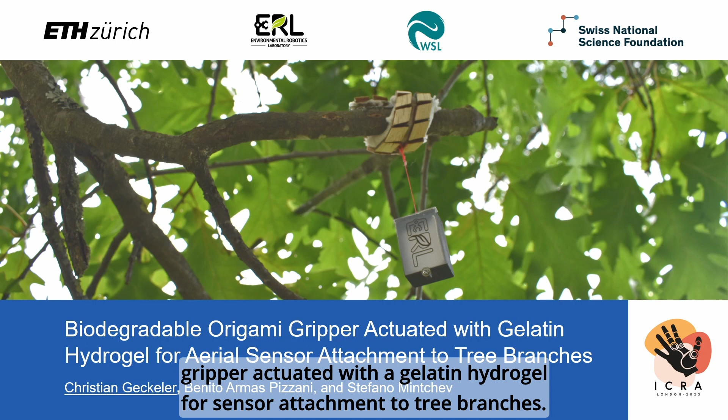Today I have the pleasure of talking about our work on a biodegradable origami gripper, actuated with a gelatin hydrogel for sensor attachment to tree branches.

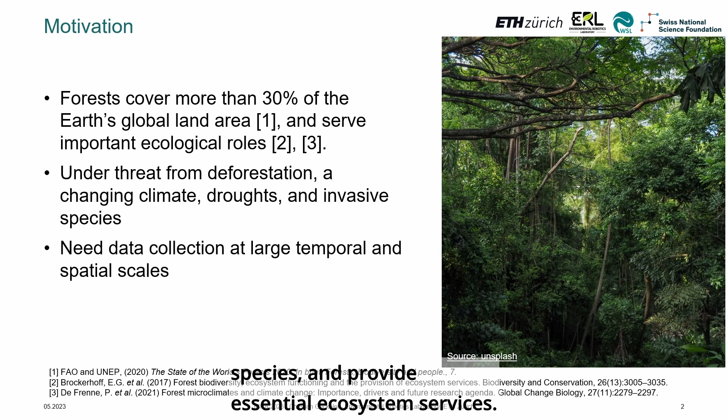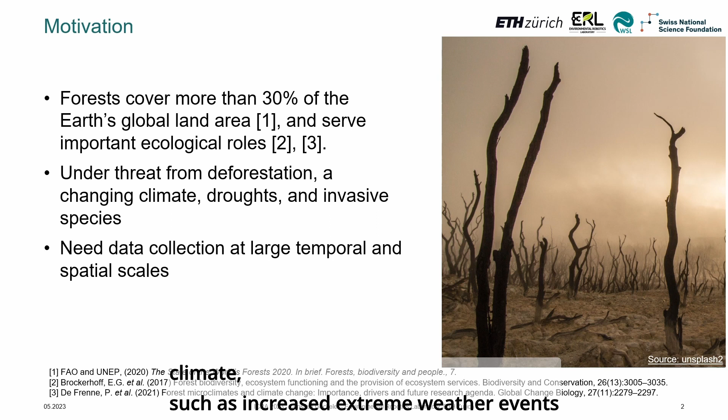Forests cover over a third of all terrestrial land area, are home to a multitude of different species, and provide essential ecosystem services. Yet they are under threat. From deforestation, with 10 million hectares being cut down every year, and from the effects of a changing climate, such as increased extreme weather events like droughts and the spread of invasive pests.

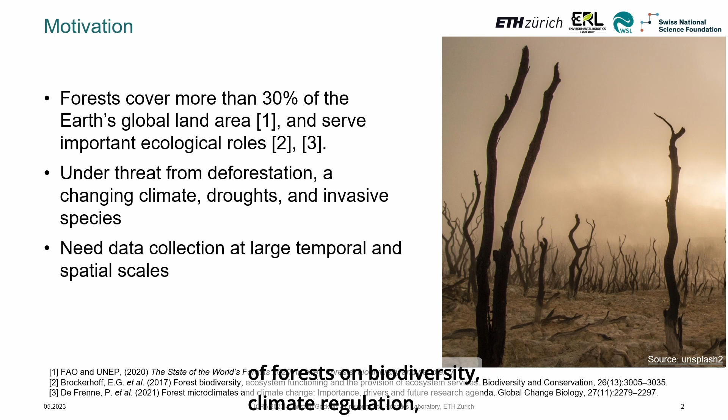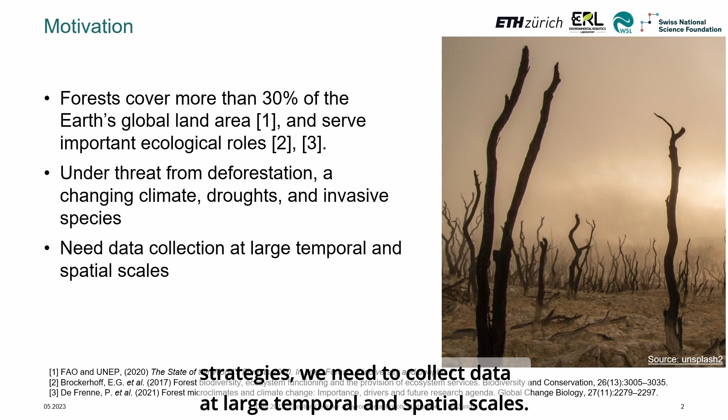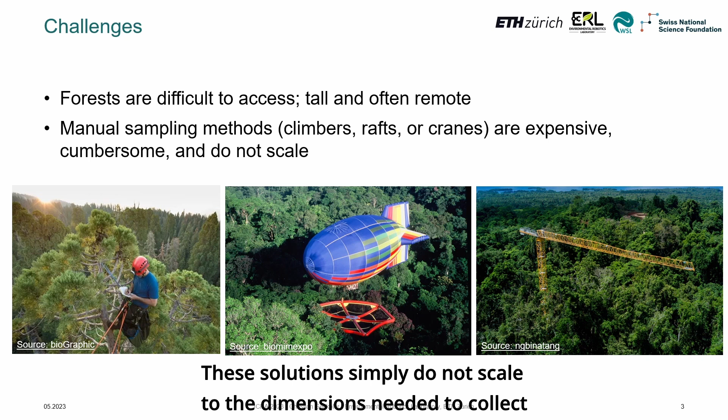In order to understand the impacts of forests on biodiversity, climate regulation, and ecosystem functioning, as well as the effect of forest management strategies, we need to collect data at large temporal and spatial scales. However, the challenge is that forests are very difficult to access, towering dozens of meters above the ground and often situated in remote locations. Current sampling solutions such as climbers, canopy rafts, or cranes are expensive, cumbersome, and labor-intensive. These solutions simply do not scale to the dimensions needed to collect actionable sensor data from the world's forests.

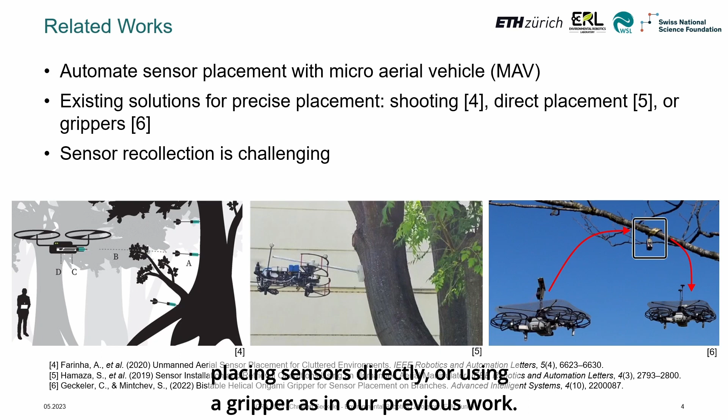Microaerial vehicles present a natural step to introduce automation and scale sensor deployment. Several solutions to precisely place sensors exist, such as shooting sensors, placing sensors directly, or using a gripper, as in our previous work.

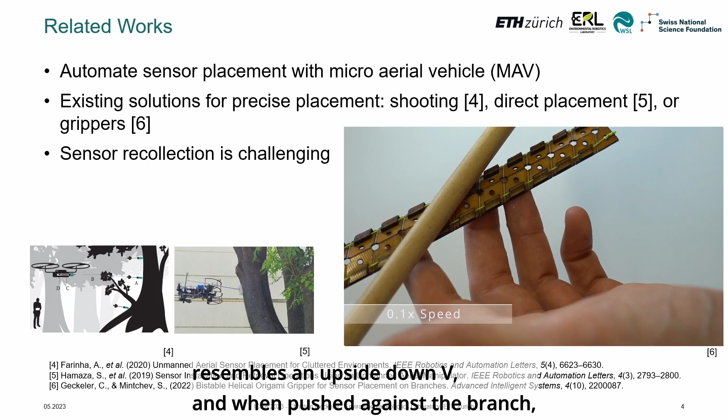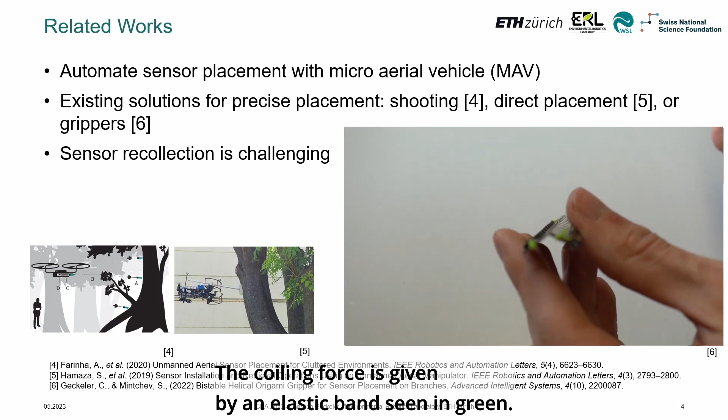Here we see the functioning principle behind the gripper. There is a flat, unfurled state where the cross-section resembles an upside-down V, and when pushed against the branch, it flattens and transitions to the second coiled state. The coiling force is given by an elastic band seen in green. The gripper and sensor can then be deployed on tree branches using a microaerial vehicle.

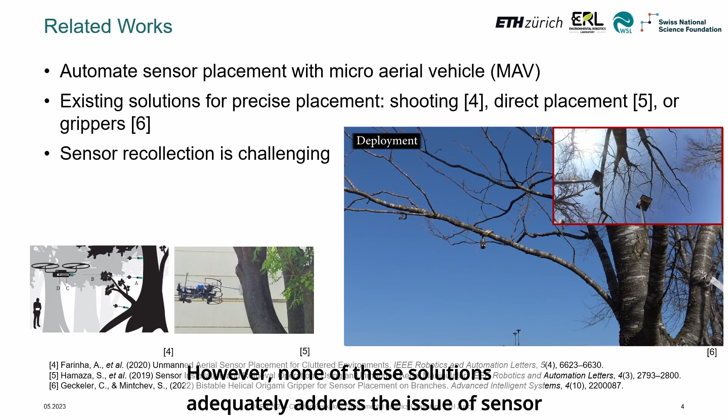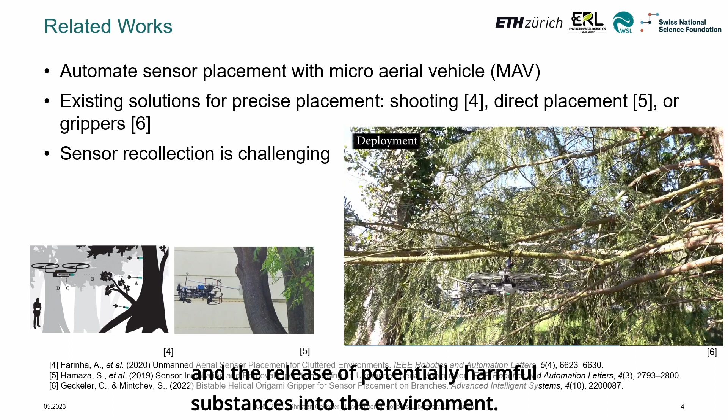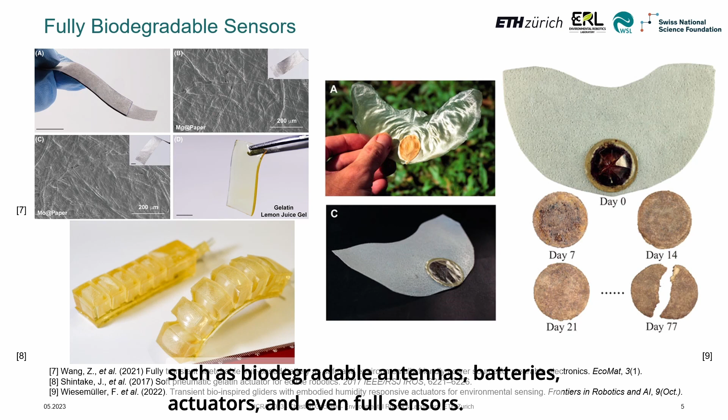However, none of these solutions adequately address the issue of sensor recollection, either neglecting it or requiring complex maneuvers. Nonetheless, recollection is essential to avoid electronic waste and the release of potentially harmful substances into the environment. Ideally, fully biodegradable sensors solve this problem, as they can decompose into harmless substances at the end of their useful life cycle. Much promising work has been done, such as biodegradable antennas, batteries, actuators, and even full sensors. However, such approaches are still under active development and not viable to be deployed in the field.

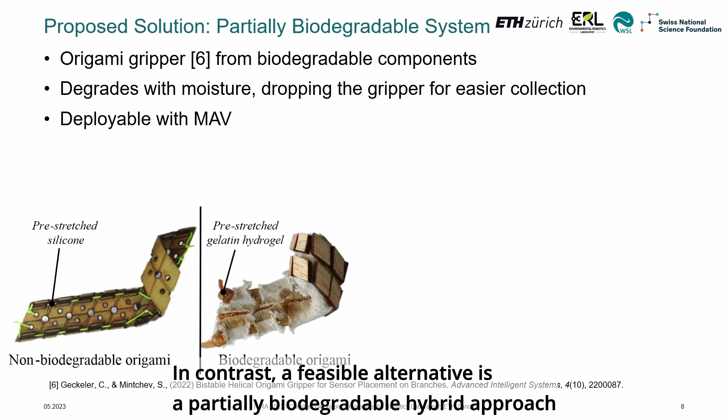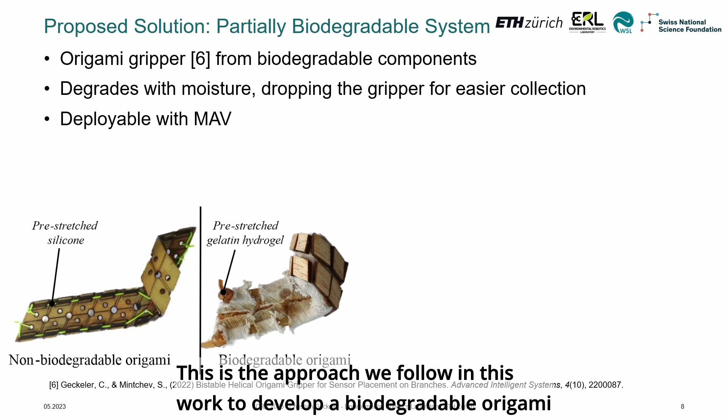In contrast, a feasible alternative is a partially biodegradable hybrid approach, which contains biodegradable components, such as structural or attachment mechanisms, but conventional sensing, communication, and battery elements, since these are the most difficult to replicate with biodegradable materials. This is the approach we follow in this work to develop a biodegradable origami gripper to attach non-biodegradable sensors to tree branches.

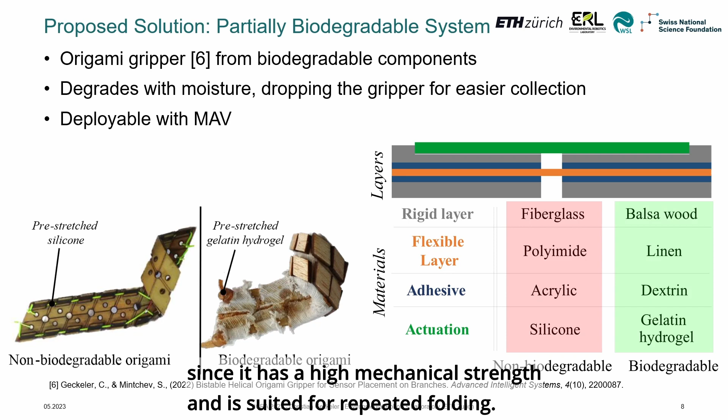Origami manufacturing consists of a laminate of rigid and flexible layers, with an engraved pattern in the rigid layers enabling folding. For biodegradable origami, a suitable alternative for all these layers must be found. For the rigid layer, we chose balsa wood due to its lightweight and high strength-to-weight ratio. For the flexible layer, linen cloth was chosen since it has a high mechanical strength and is suited for repeated folding. As an adhesive, a dextrin-based starch adhesive was used since it is widely available and well studied.

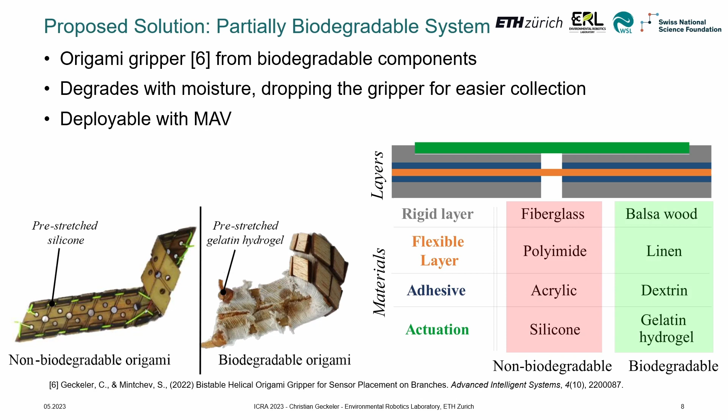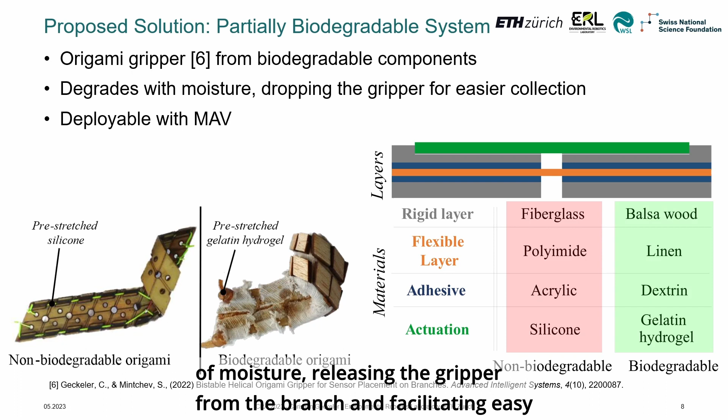Lastly, gelatin hydrogels present high elasticity, fast biodegradation, and simple manufacturing, and were thus chosen as the actuating elastomer. The hydrogel dissolves in the presence of moisture, releasing the gripper from the branch and facilitating easy collection of the electronics from the ground.

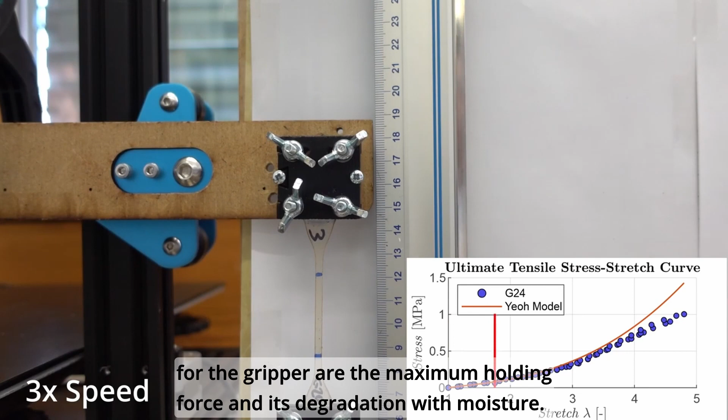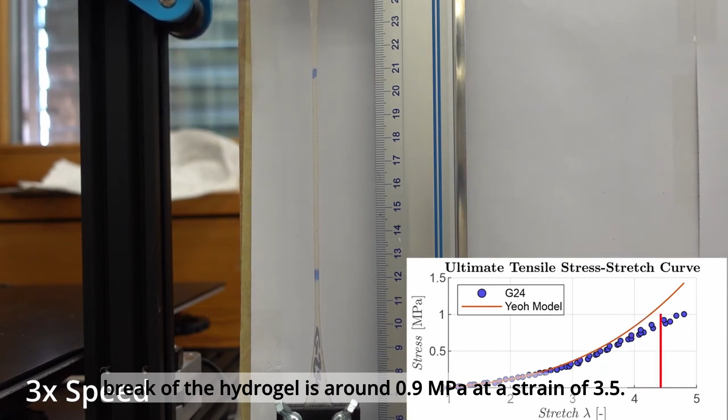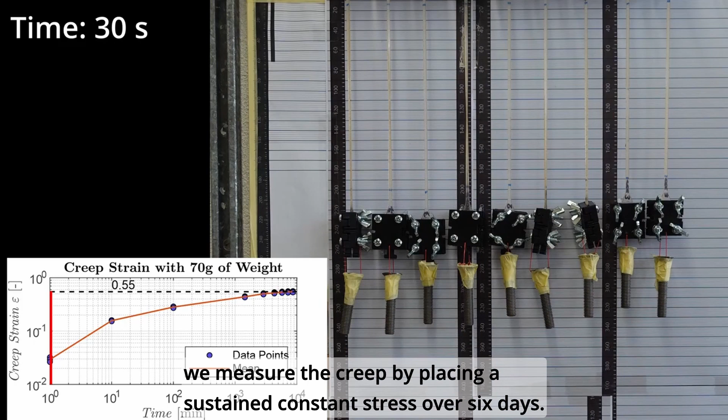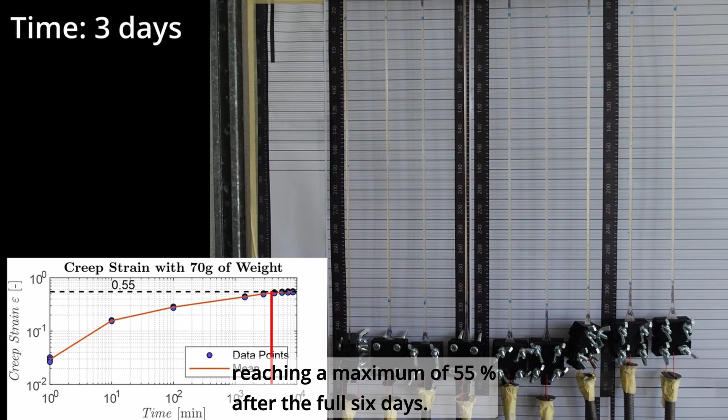The two main properties of interest for the gripper are the maximum holding force and its degradation with moisture. The maximum holding force is directly determined by the properties of the gelatin hydrogel. The ultimate tensile stress before break of the hydrogel is around 0.9 megapascals at a strain of 3.5. To see how the gripper performs under a sustained load over time, we measure the creep by placing a sustained constant stress over 6 days. After the first hour, the creep plateaus, reaching the maximum of 55% after the full 6 days. The final gripping force of the full gripper is around 1 Newton.

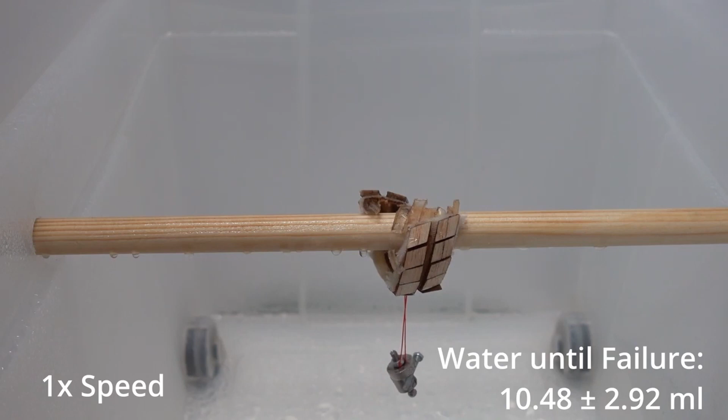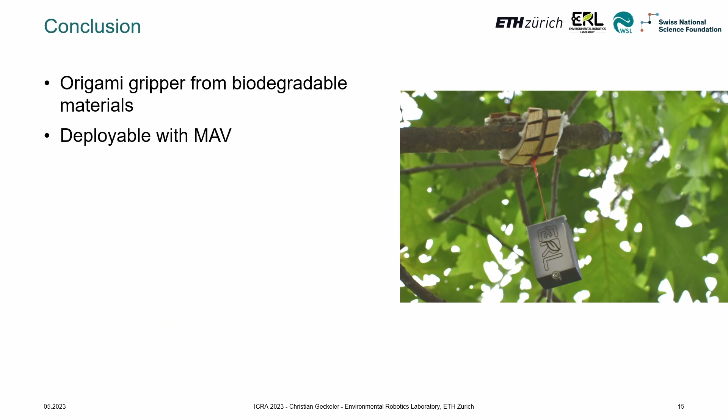When exposed to sufficient moisture, the gelatin degrades and the gripper falls, allowing really easy collection of the electronic components from the forest floor. Finally, to demonstrate the applicability of the biodegradable gripper to deploy sensors, we attach it to a branch with a micro-aerial vehicle.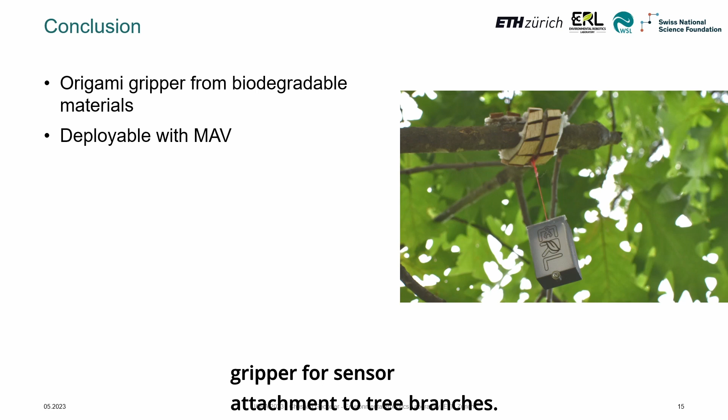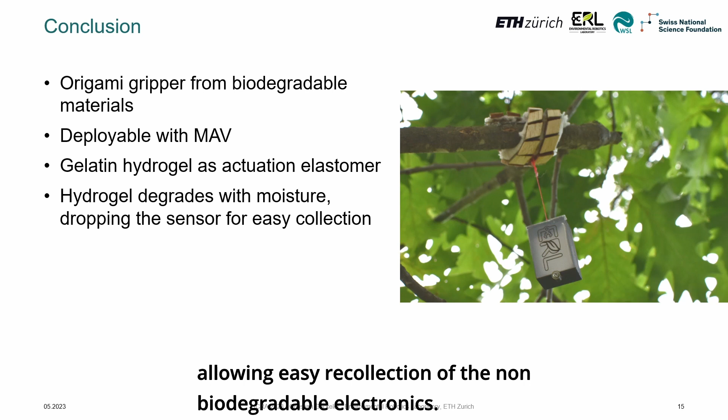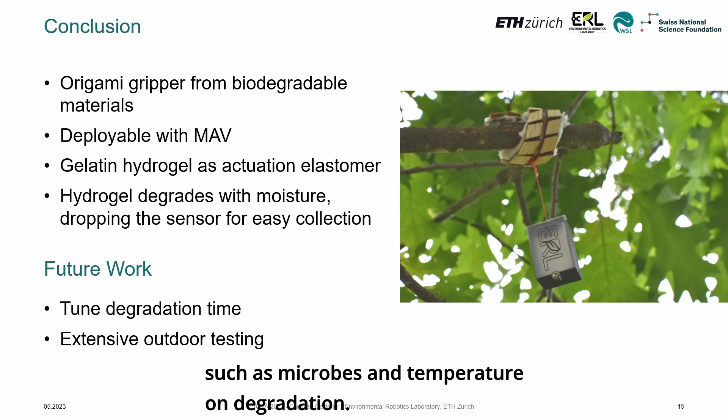In summary, we substitute biodegradable materials to develop biodegradable origami. This is used to replicate an origami gripper for sensor attachment to tree branches. A gelatin-based hydrogel is the actuating elastomer, which degrades once exposed to sufficient moisture. This drops the biodegradable gripper, allowing easy recollection of the non-biodegradable electronics. In the future, we will look at tuning the water resistance of the hydrogel and the effect of outdoor conditions, such as microbes and temperature, on degradation. Overall, this is a first step towards scalable and more environmentally sustainable ecosystem monitoring.